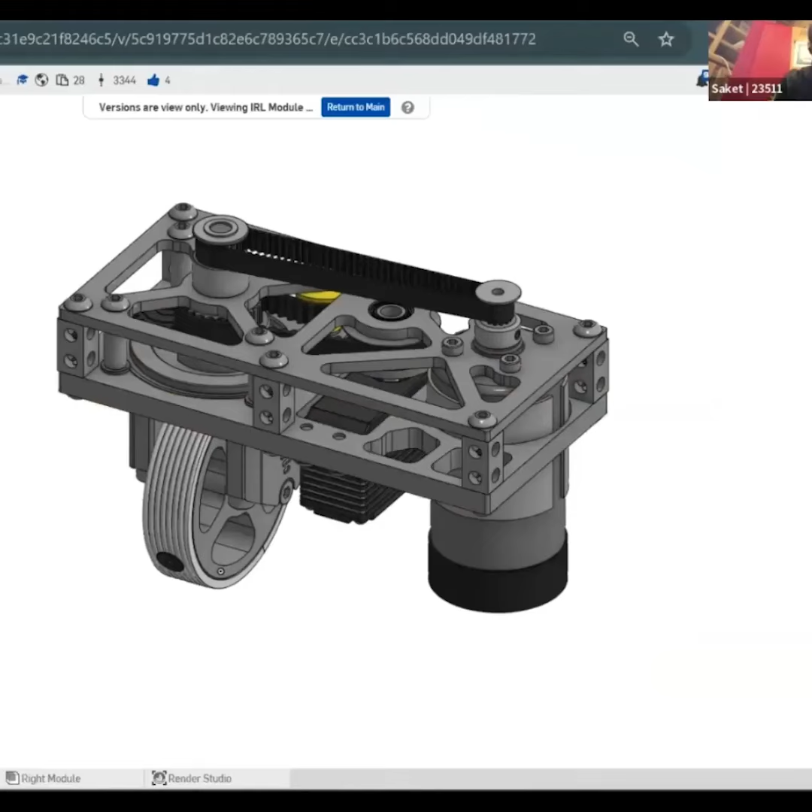Starting out with how we make this modular, we actually split up our entire Swerve module into 3 different parts. So we start with the lowest level, which is the wheel. This is just a simple aluminum wheel with some tread on it, but you can see that it's modular within the next level, which is the pod.

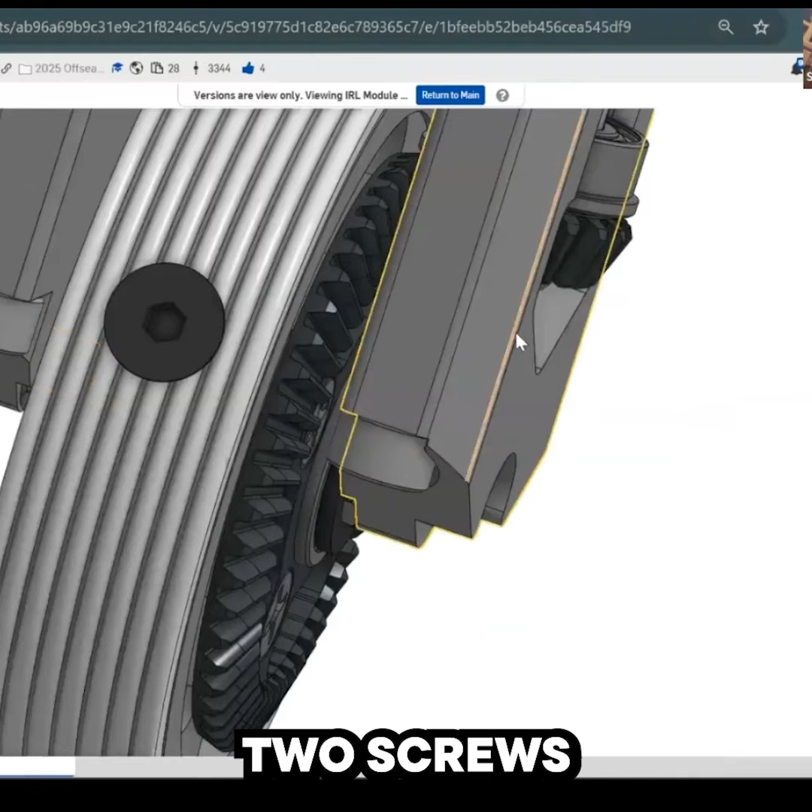So by removing this screw and this screw, if we hide these 2 screws, in real life you'd unscrew them, this entire axle over here and the wheel that's on it are basically able to slide out from the bottom. So we actually have a slot over here that allows you to just take this entire thing out the bottom.

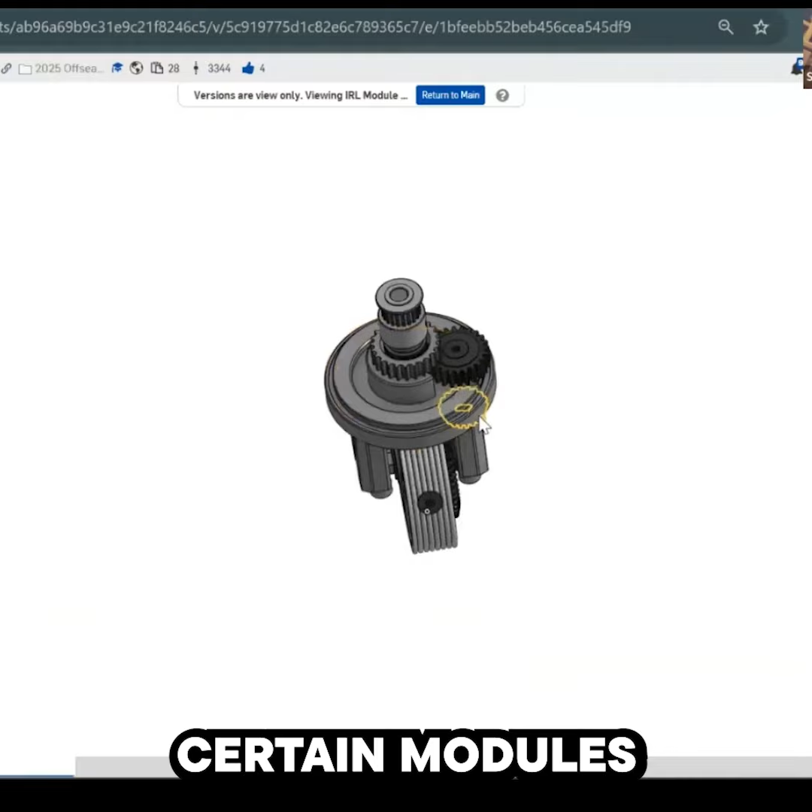We realized that using accessibility through the bottom of the robot was going to be very efficient, because a lot of the times you have stuff on top of your Swerve modules or on top of your mecanum wheels on your drivetrain, but there's not usually much happening below your robot. So we kind of made everything accessible from the bottom.

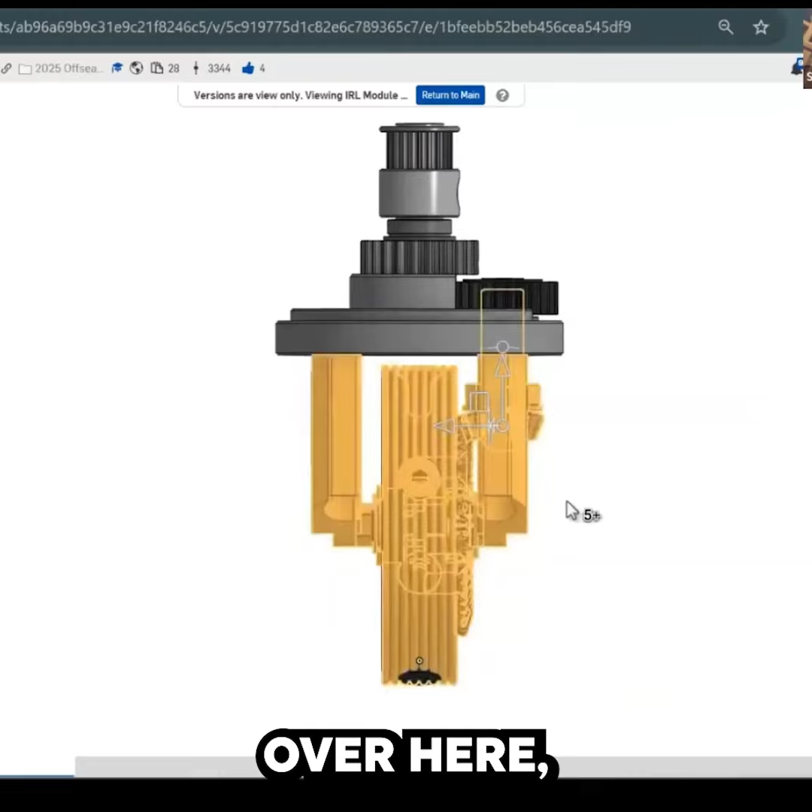This also means that not only do we have the wheels modular like that, if you unscrew these 4 screws, then we're essentially able to take out everything on this bottom half. So everything over here is just able to slide out, and we're able to access anything. So if we need to replace the tread, tighten any screws, anything like that, we're able to have access to that. But it doesn't just stop there, because we go further in the next step of the module.

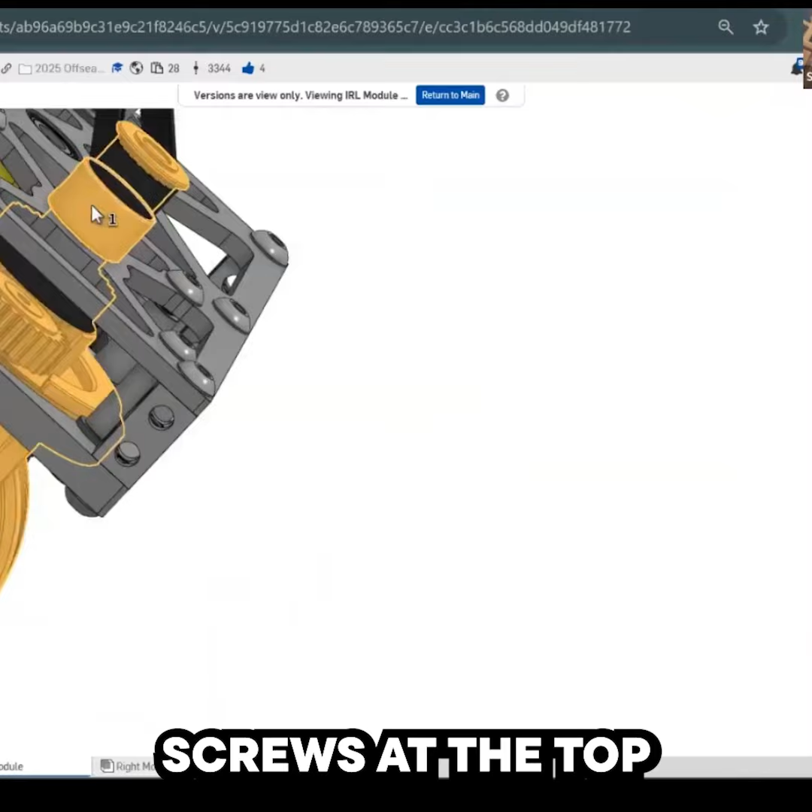We're actually able to take out the entire pod, so that entire previous subassembly. If you loosen some set screws at the top and you remove these 4 screws, again, accessible through the bottom, just so that we have full control over being able to remove things. So if we hide these 4 screws, there's actually nothing constraining the pod from just being slid out the bottom. And again, we're able to access anything.

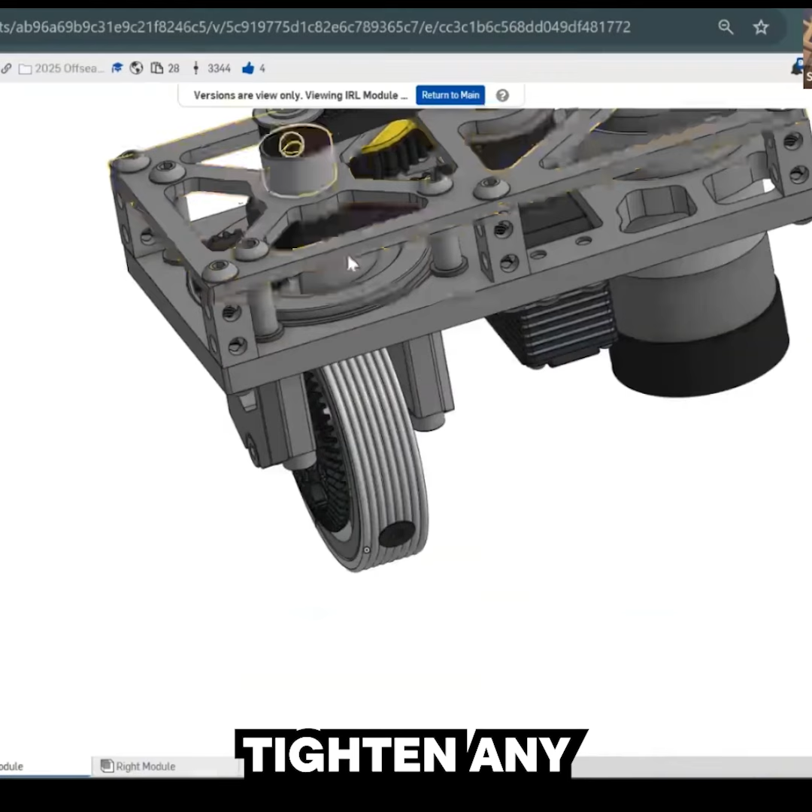So if we want to grease the gears because we want higher efficiency, if you need to re-grease them, you can through that. Or if you need to tighten any screws, again, inside here, it just makes it a lot easier to do all that.

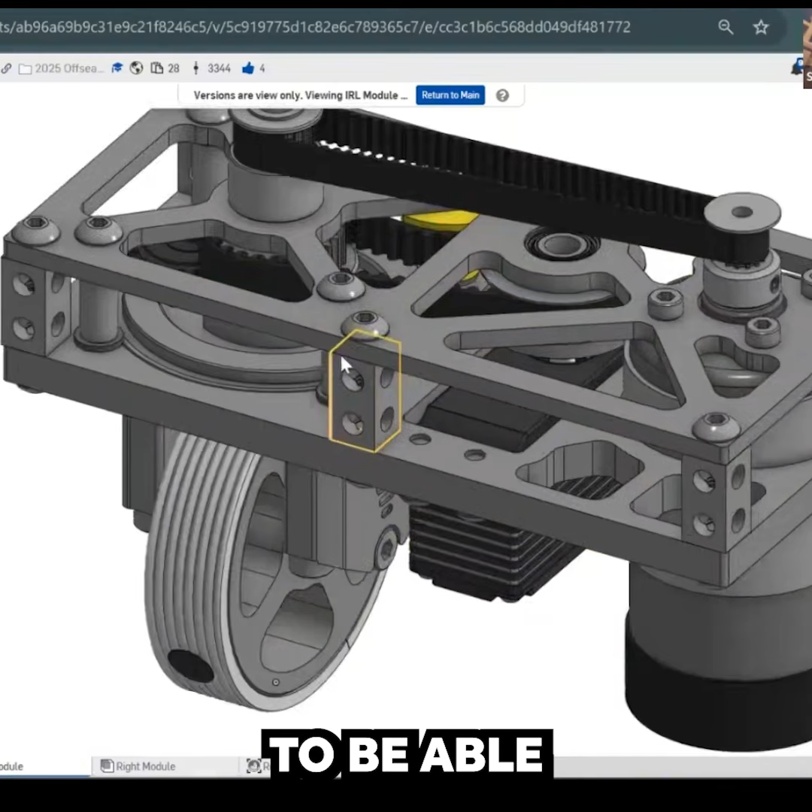And then finally, at the highest level, this entire Swerve module is designed as a module and not directly integrated into a drivetrain, which has one big plate which has all 4 wheels and everything mounted onto it, because we wanted it to be able to be replaced with these side mounting screw holes with these square beams. So this allows us to essentially unscrew the Swerve modules entirely.

So if we want to completely replace the module and replace it with mecanum, or if it's just sometimes easier to access, for example, the servo over here, if you take out the entire module, we also have the ability to do that.